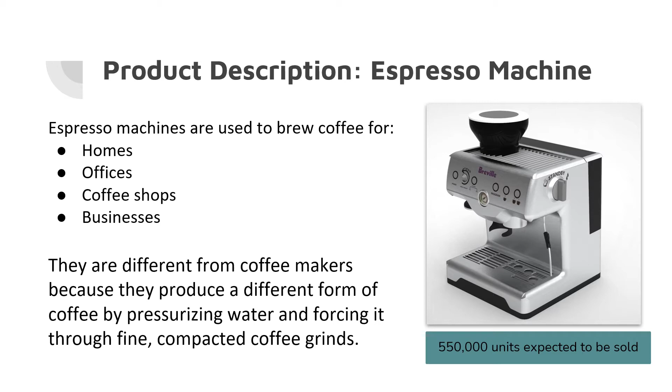They're a lot different from regular coffee makers that you might have in your home because they produce a lot stronger form of coffee by pressurizing the water at a precise temperature, running it over the finely ground coffee. There's a lot of key components that you can see here in the rendering, such as the bean storage, the water reservoir in the back. There's a control panel and a steam wand to heat up your drinks. The total amount of units we expect to sell is 550,000.

And here we have the exploded view of the CAD that we initially borrowed, showcasing some of the components that we focused on for the redesign. We've got the water tank in the back, the bean hopper up top. We've got the front control panel all there that you can see all separated out.

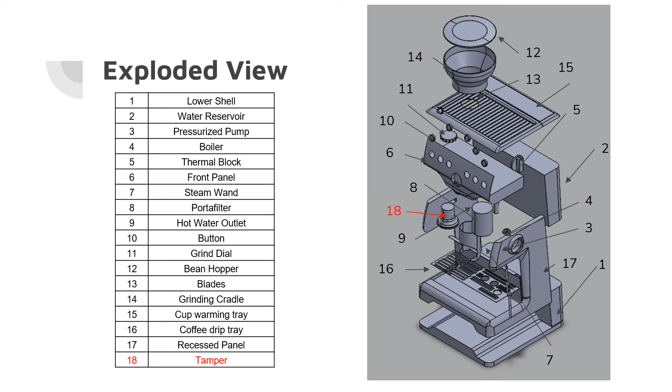And here we have our consumer groups, the primary of which is residential use in the 35 to 60-year-old age range. We have a little bit higher age range because the price range is higher on these devices. The secondary consumer group is smaller office spaces, maybe something like a hair salon. It's not quite Starbucks level, but the commercial version will put out the quantity needed for those kinds of spaces.

And here we have our FAST diagram. You can see the task function is to brew the espresso. There's 4 primary basic functions: pressurizing water, grinding beans, heating water, and dispensing espresso. Pressurize the water by pouring water and increasing the pressure of the system. You then grind the beans by storing the beans and rotating them. Heat the water by storing the water and adding heat.

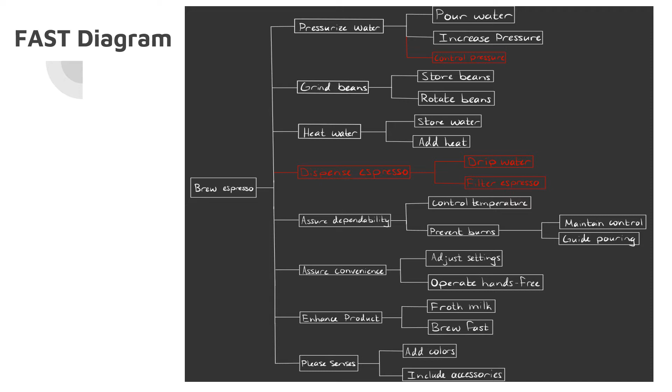We need to assure dependability by controlling the temperature and preventing burns by maintaining the control and guiding the pouring of espresso. You dispense the espresso by dripping water and filtering the espresso beans. We need to assure convenience by making the settings adjustable and allowing hands-free operation. We enhance the product by controlling the pressure, frothing the milk, and brewing espresso quickly. Finally, we need to please the senses by adding a variety of colors and including accessories.

This is the function component mapping matrix. The matrix relates the components listed in the bill of materials to the basic functions listed at the end of the FAST diagram. We see a difference between components that serve one purpose and those that serve multiple functions. For example, the lower shell is used to add colors, while the front panel helps to control temperature, adjust the settings, and include accessories. Having multiple components that serve the same function tells us the importance of each function.

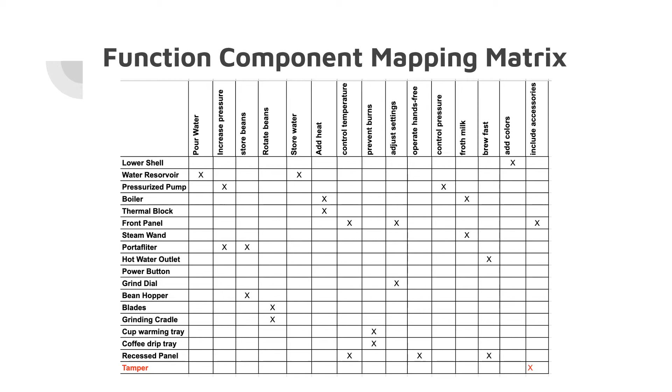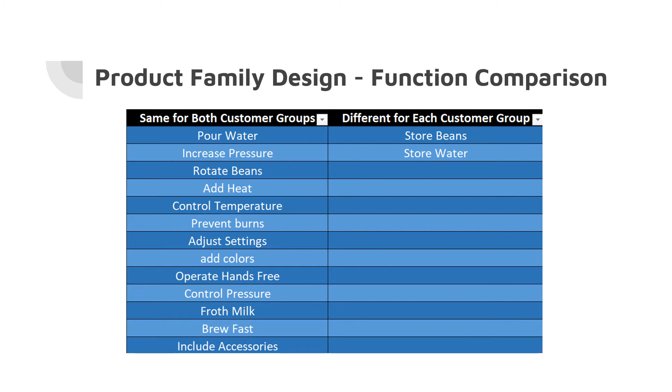And here we have the functional comparison for our product family design. As you can see, the functions of storing the beans and storing the water are the only differences between the consumer groups. And accordingly, the water reservoir and the grinding cradle are the modules that change from one platform to the other.

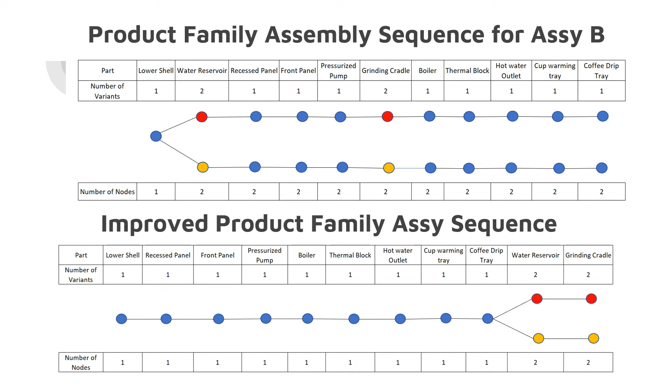And here's a couple assembly sequences. As you can see, we improved this assembly sequence greatly, delaying the differentiation of the assembly by moving the modules to the end of the assembly sequence, the water reservoir and the grinding cradle.

Here's a spreadsheet that looks at our design for manual assembly analysis, looking at the insertion and handling time for each part. In total, the operation time came to 120 seconds. We also calculated the manual assembly efficiency, which came out to 27.5%. The parts highlighted in green have high operating times, and we will be redesigning these parts to reduce operation time and increase manual assembly efficiency.

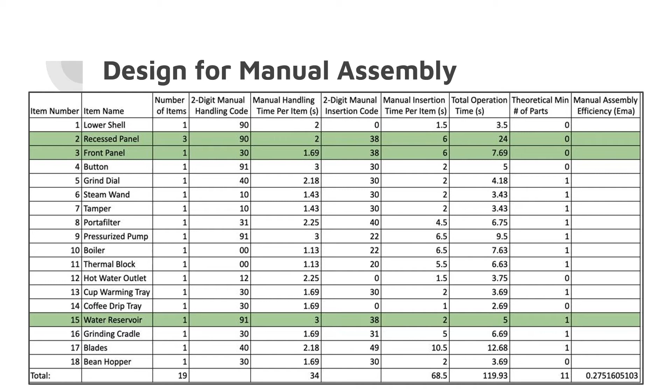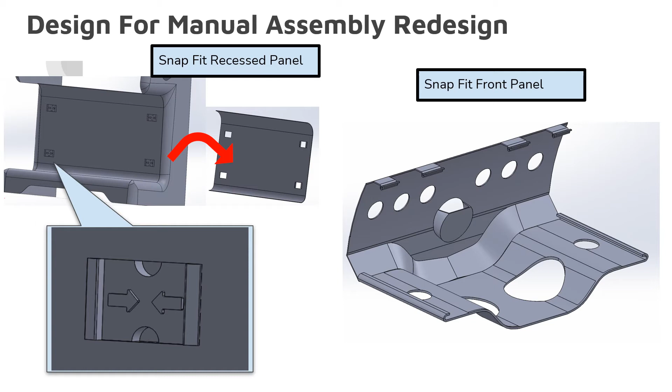The first changes we focused on making were adding snap fits for various panels to greatly reduce the total assembly time of the part. This also increases the accessibility of disassembly and performing repairs for both the consumer and the manufacturer. Let's take a closer look at the front panel. By changing it to a snap fit design, we are increasing ease of assembly and decreasing screw count, which follows DFA 1, 2, and 3.

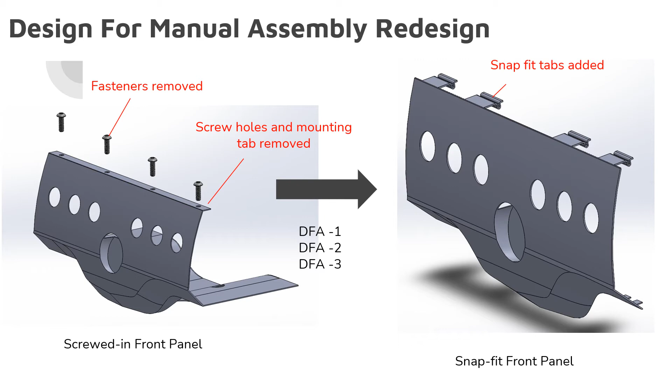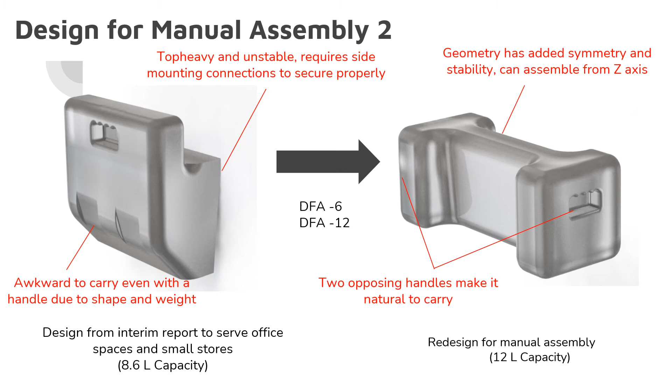The final reservoir redesign is even bigger to serve more customers and features two handles on opposite sides of the tank, so it's easier to carry and assemble, even with the extra capacity in the larger product variant. Its new shape allows it to be connected to the rest of the machine through only the bottom without fear of tipping over. And here you get a look at our analysis for the redesign for manual assembly.

With the addition of snap fits and the reduction of fasteners, the operation time for the recessed panel assembly was halved. The total operation time for the front panel was also decreased. As you can see, the total operation time is now 102 seconds, a reduction of 18 seconds from the original design. The manual assembly efficiency also increased by approximately 5 to 32%.

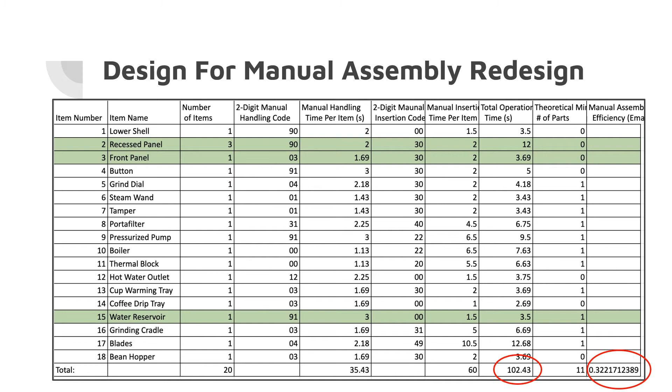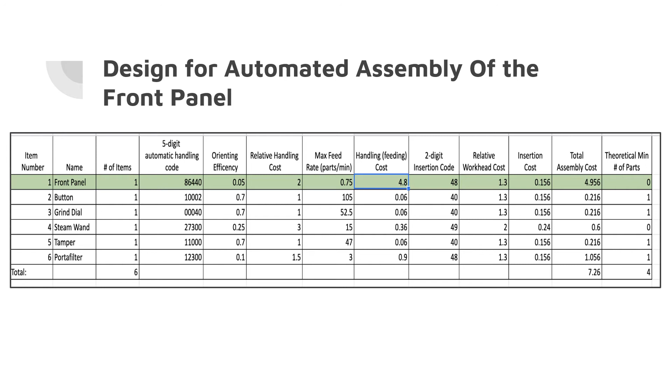We also analyzed the front panel subassembly to determine its viability for automated assembly. We analyzed the orienting efficiency, relative handling cost and feeding cost, as well as the insertion cost to determine the total assembly cost for the automated assembly. We found the total assembly cost to be $7.26 for automated assembly. The front panel subassembly contains many different valves, tubes, and buttons that can benefit from automated insertion.

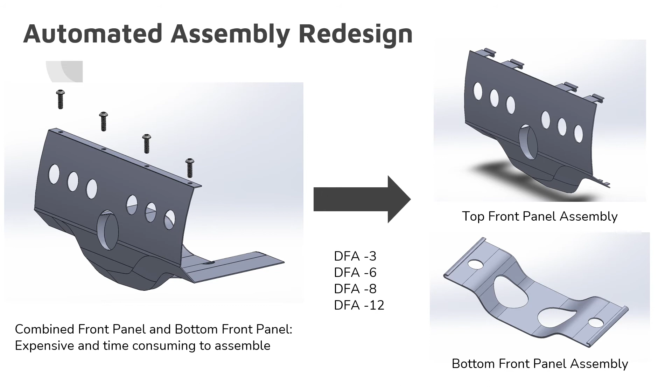However, the geometry of the panel is very complicated, so we can optimize it for automated assembly by splitting it into two pieces and redesigning them so the valves, that is the portafilter, grinder output, etc., can be easily automatically assembled by a machine. The bottom panel is then joined with the front panel and manually assembled with a snap fit shown earlier. This reduces operating time, part complexity, and assembly cost.

Our focus for this redesign is on the bottom plate, which contains circular cutouts of different sizes for the valves that compromise its symmetry. The size and position of these cutouts have been adjusted so that the part now has both X and Y axis symmetry, making it very easy to orient. The ends are then curled to prevent overlap during automated assembly.

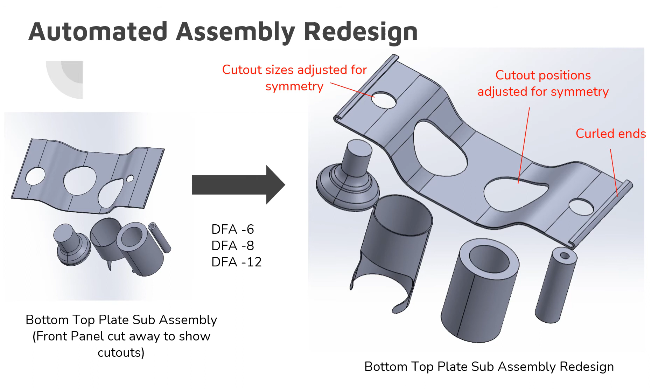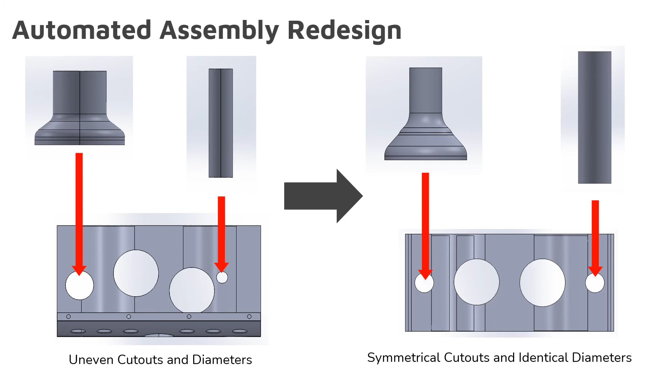This redesign also required changing the tamper and hot water outlet so the cutouts on the previous slide can be symmetrical. This involved altering the diameters of the handle of the tamper and outer diameter of the outlet to be identical. These changes are shown along with an overhead view of the plates. And here you can see some of our analysis for the automated assembly redesign.

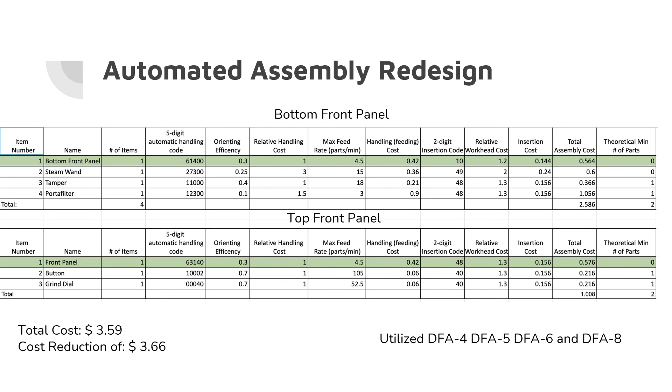There are now two sub-assemblies to make this part the most conducive to automated assembly. The top chart analyzes the redesigned bottom front panel part and shows that it has a total assembly cost of $2.59. The top front panel has an assembly cost of $1 after redesign. The total cost for the assembly of these two sub-assemblies is $3.59, yielding a reduction in cost of $3.66 because of the redesign.

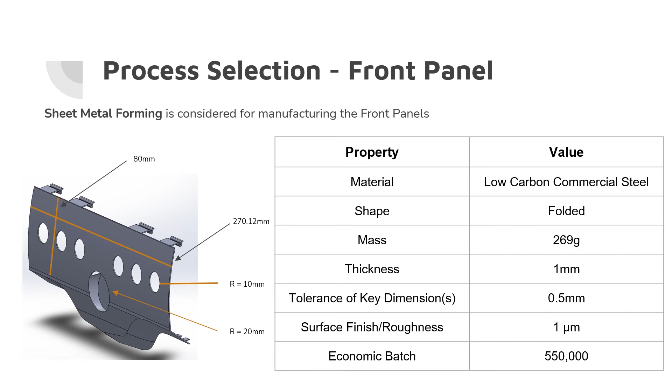Here you can see our process selection for the front panel. We chose sheet metal forming with low carbon commercial steel; it weighs 269 grams with a thickness of 1 millimeter. Here are some of the key dimensions for the front panel. Here's a table analyzing the processes compatible with the material. As you can see, sheet forming is the only viable option for us.

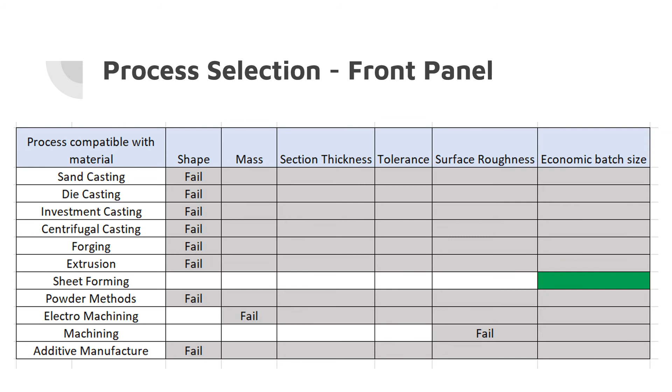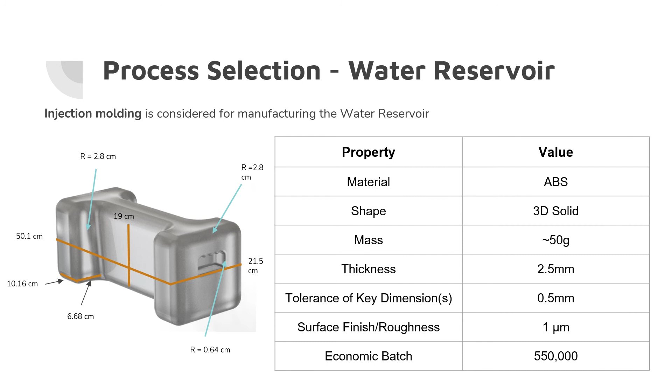And here you can see we picked injection molding to manufacture the water reservoir. It has a thickness of 2.5 millimeters, and we chose ABS as the material. And some of the key dimensions from the CAD of the water reservoir. And here's our process selection table for the water reservoir. As you can see, all of the processes compatible with the material fail except injection molding.